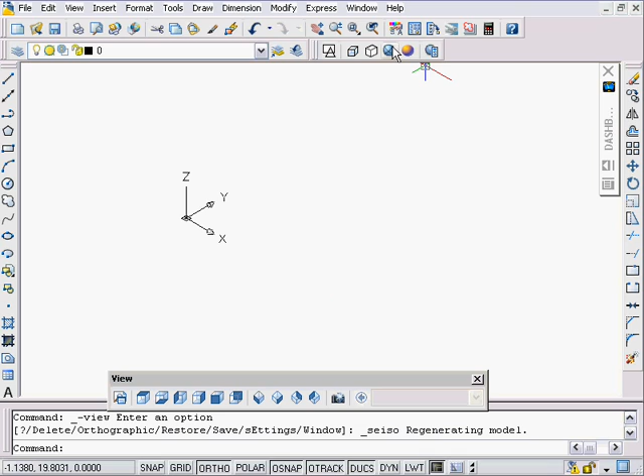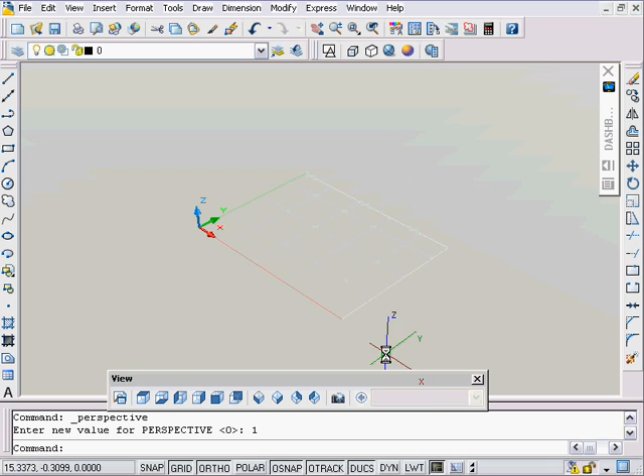So I'm going to do my usual setup by going to a southwest isometric view, then switching over to my conceptual view. I'll make sure my conceptual view has jittering and edge extensions turned on. I'm going to hit F7 to turn my grid on, go to my dashboard and switch into perspective mode, and hit F9 to turn my snap on.

Okay, I'm going to start by just drawing some basic shapes, so I'm just going to get some geometry on there. Doesn't really matter. Okay, use my wedge tool.

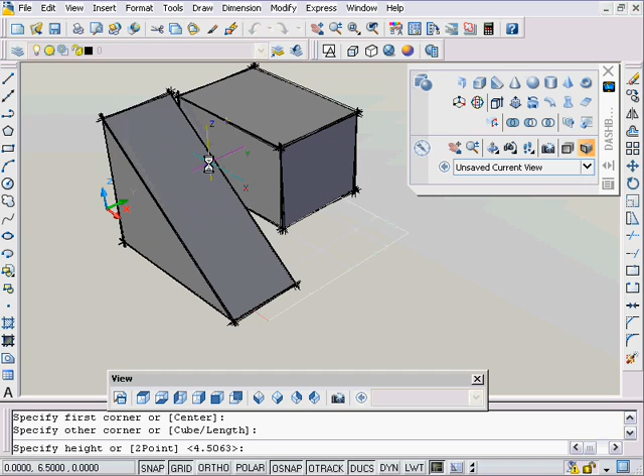Maybe use that. If I want that to be as high as that box, what I can do is shift plus middle mouse button, hover over this and use my object tracking, and once I track to that point, anywhere I pick along there will make sure that it's at that same height.

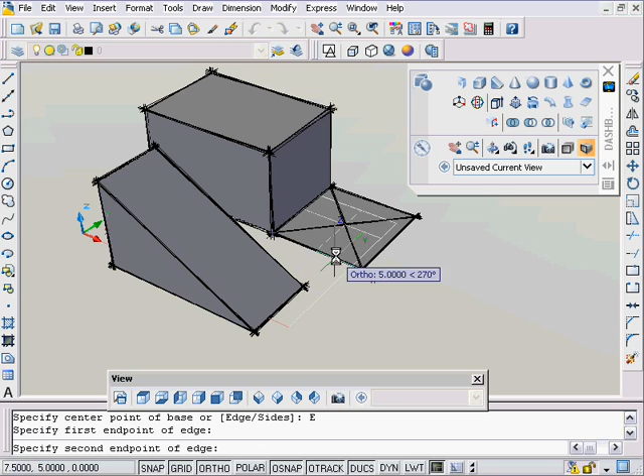Similarly, if I go over here and use a pyramid in edge mode, maybe I go along here, I can use my object tracking to pick that point. Then when I go up, I can hover over a point, and as soon as you track to that point, bang, you're on, and you can see how those are all aligned like that.

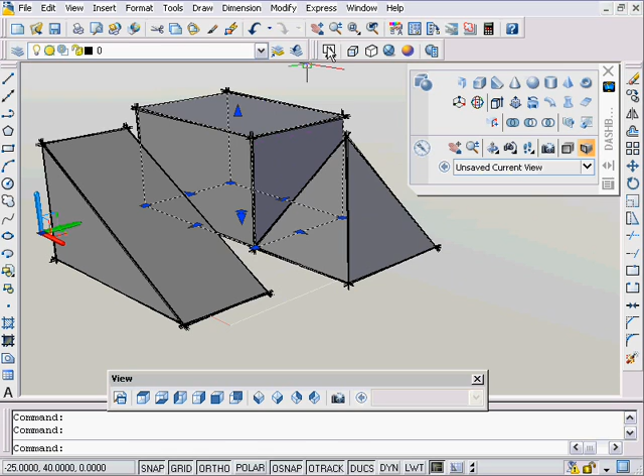Then I usually go in here, click on this stuff, hit my properties button, and add some color in here just to give things a little bit of a zing for the watching audience.

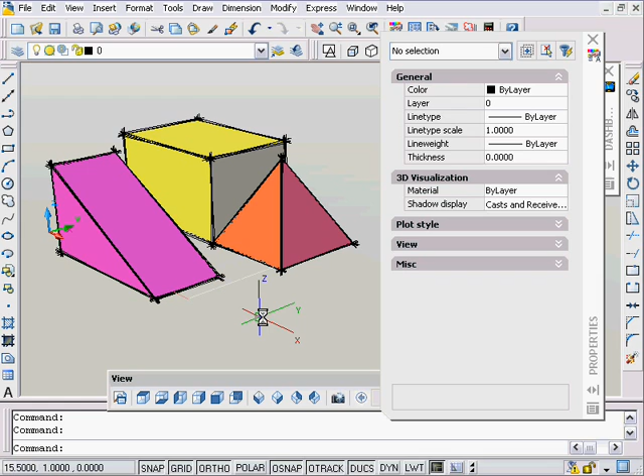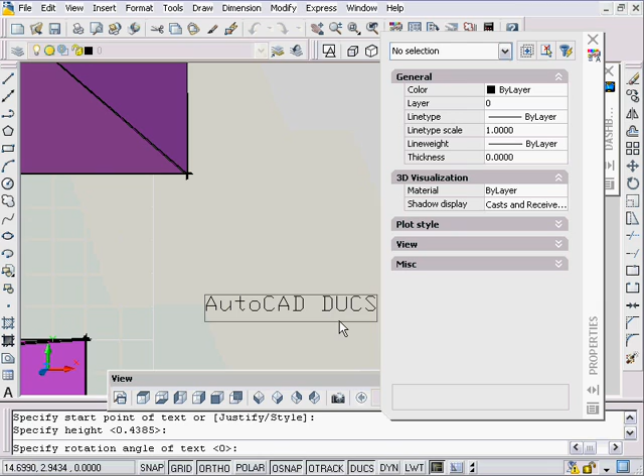AutoCAD D-UCS rocks, and then go down into here, and then I'm going to kind of get sneaky and click on these two pieces of text because they're D-text. I can give them a thickness of, say, 0.1.

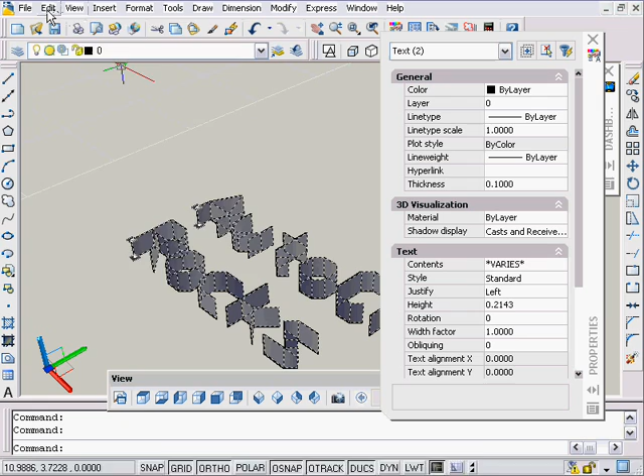Okay, now I can go up to this text, or this could be anything. Click on these two objects and say edit, copy with base point, then maybe pick down there as my base point and hit escape.

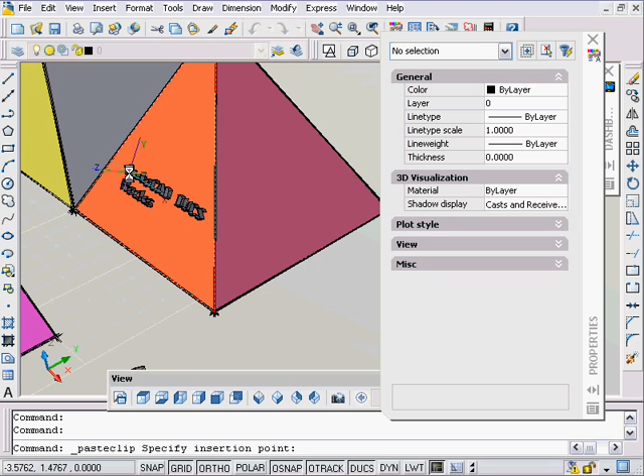Okay, and now I can go Control V. Control V, and you have to make sure that you get on the right surface, then you can hover over there and paste that. I can go Control V, hover over here, notice hovering to get the face, and then click on there.

Control V over here. Okay, and you can do this with anything, not just text. I can have any sort of shape I want over here. I can draw a cylinder.

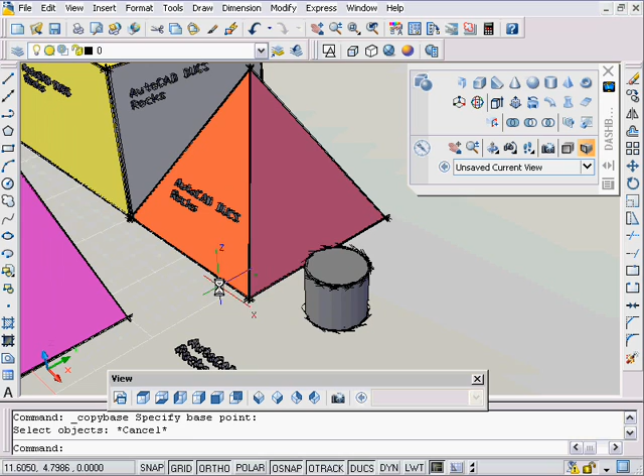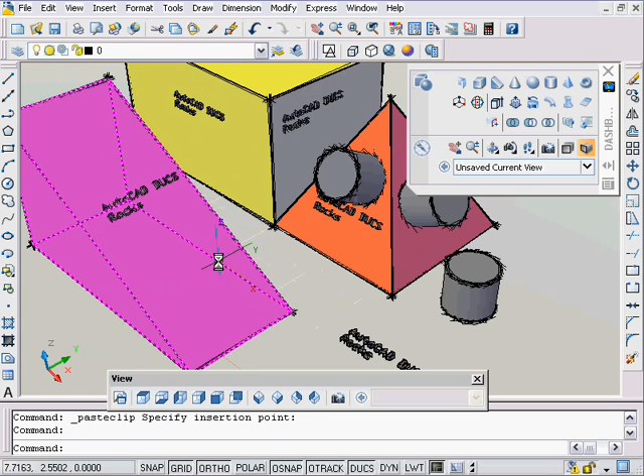I can say Edit, Copy with Base Point here, and then Control V. Let's try that again. Click on here, Edit, Copy. I usually say copy with base point. You can do a Control C, Control V, but it's not quite as predictable. Okay, Control V, paste that over there. So have some fun with that.

You can also go in and do the same thing as with an image, for instance. I can go up here and say Insert, Raster Image, grab an image, hit OK, and then hover over somewhere and place that on there.

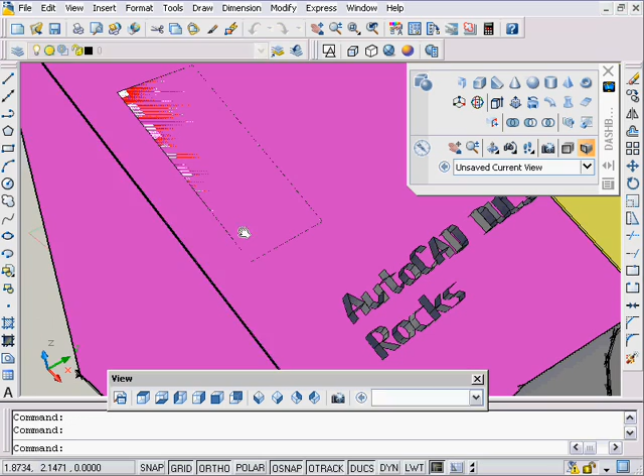Now in this case I've put my logo on there, and it's right on the surface, which means it's having trouble showing. So I'm going to go to the front view, say M for move, switch to 2D wireframe. There it is right there. I'll say M for move, L for last, and move that off of there a smidgen.

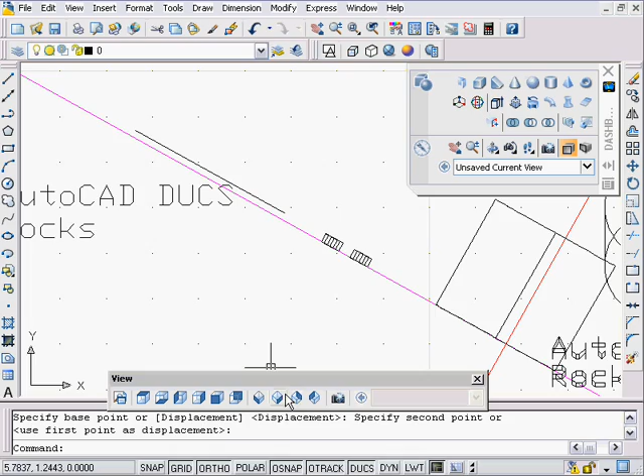Okay, go back to here, and now I can go back to my conceptual view and perspective and have that logo on there. Insert, same thing, different surface, place it on over here for your billboard effect, and then move that off of that surface if you want it to show.

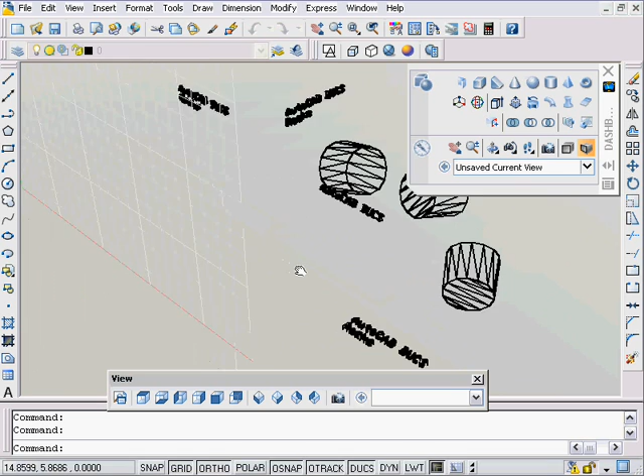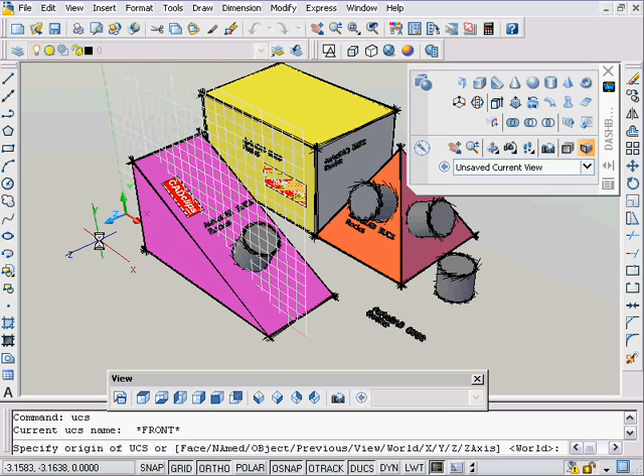You can see right now my grid is showing my UCS is pointing vertical, and that's because when you switch to these side views, it changes your UCS to be perpendicular to that. Then when you go back to your 3D view, you're left with that last one. So note where my X and Y is. You might want to type UCS W for world just to set that back. That's a good thing about hitting F7 - keeping your grid on lets you know where your UCS is, but you should be able to look at your X, Y, Z.

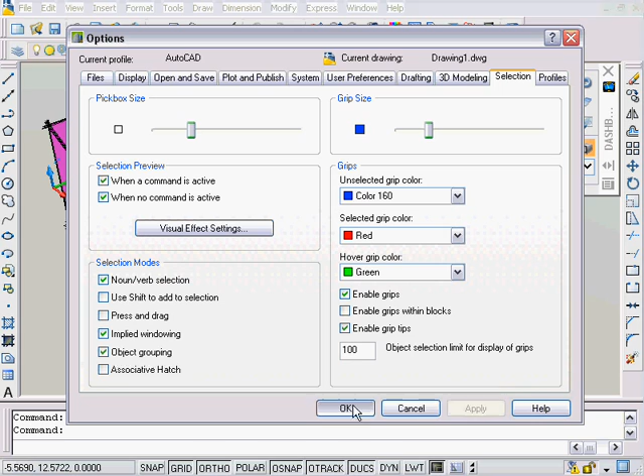So using your dynamic UCS - remember Tools, Options. For your dynamic UCS to work, we want to have these settings on, definitely when a command is active. I've covered this in a previous lesson. Our dynamic UCS button has to definitely be on to do what we're doing here.

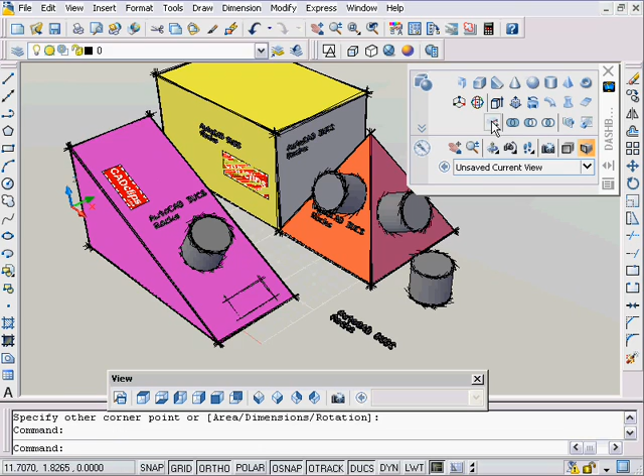And then we just have our geometry, so you can cut and paste, you can draw - we've already seen how you can use push pull and different things, and we're going to talk about imprint where we can imprint stuff. So using dynamic UCS to cut and paste.

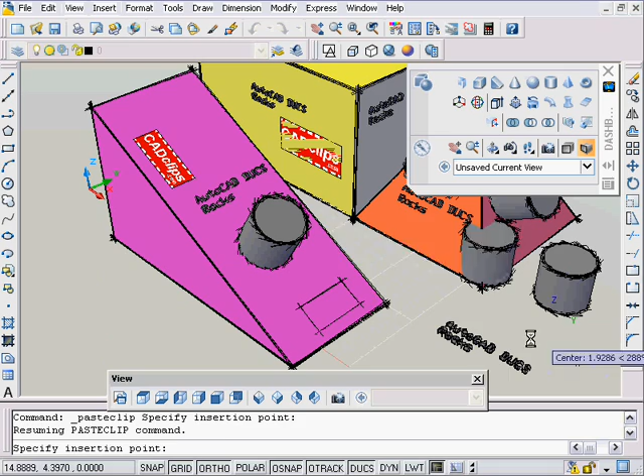Let's just try this with Control C, Control V, Control C, escape, Control V. Notice Control V works, but it's not in sync because of the base point. That's why I always go Edit, Copy with Base Point, and then pick my base point, select the object, and then when I do my Control V, I'm in the right place. So cut and paste with your dynamic UCS.

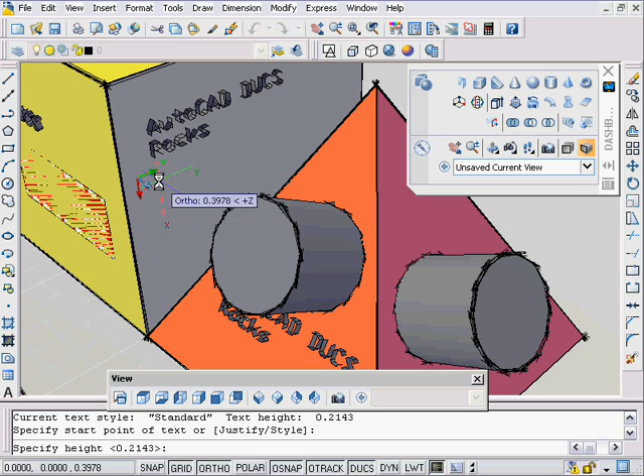Put text, even if you wanted to - let's try doing the Dtext command all by itself. Click on here. You can put text right on the surface by doing that. I don't know how applicable that is, but you can do that. So anytime you want to work on any surface, use your dynamic UCS. Also, if you want to get a shape, draw it over on the side somewhere, don't worry about it.

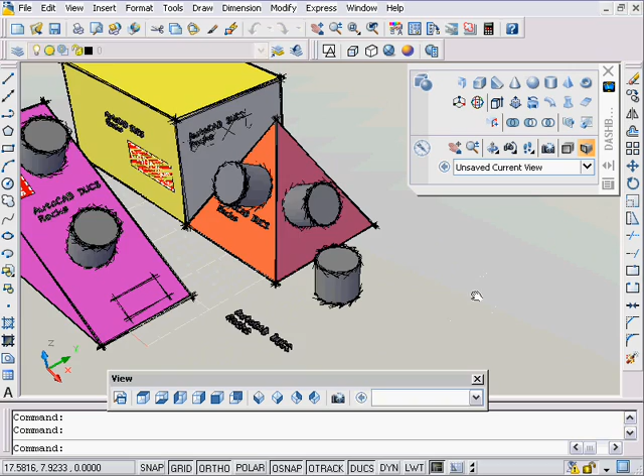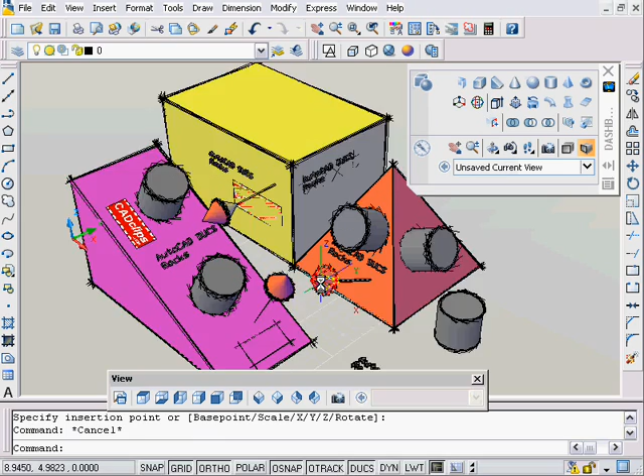You can insert blocks. I almost forgot - I'm going to type I for insert. I'm going to insert a block called Tower as an example and hit OK. Notice what's going to happen here is I hover, and I can place one on there. Hit enter, insert another one, hover over that surface, place one on there. Hit enter, bring one back, hover over there, place an object on there. These are just little model objects that I've made as a block.

So inserting blocks, cut and paste, text - just go nuts with your dynamic UCS and have some fun.